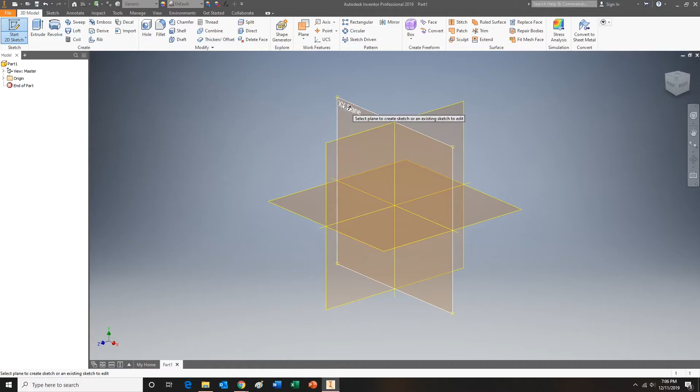All right, start a 2D sketch. I'm going to choose the XY plane. I'm going to do a rectangle, starting with a rectangle that's going to be 2.25 wide.

I'm going to hit tab, and it's going to be 1.5 tall. Hit enter, you can't see it. I'm going to center tap my mouse button, and now I can.

And now I need to cut out the center section at the bottom. I'm going to do another rectangle. I don't want it to be on this green dot, I need it to be over to the side a little bit.

If you look at the little arrow underneath my mouse here, the arrow is pointing at a red line, that means I'm on the red line. And I'm going to draw my rectangle: 0.75, tab, 0.75, enter. You'll notice that these lines are green and these are purple.

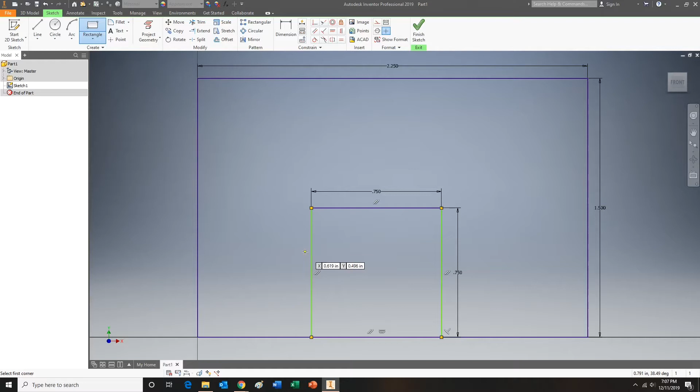The purple ones are locked in and they're good, the green ones are not dimensioned. So I'm going to come up here and choose dimension. I'm going to choose my green line, come over and hit the other purple line, and it will tell me the distance between.

I need to click it down, and I'm going to type in 0.75. And now it's locked in. They're all purple, and I'm ready to go.

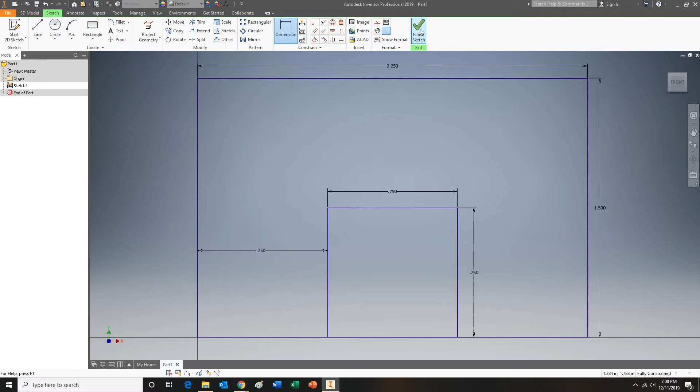Finish sketch, double tap my center mouse button, extrude. I'm going to choose this surface.

I want it to be 0.75, enter, and now I need to put another rectangle on this side here.

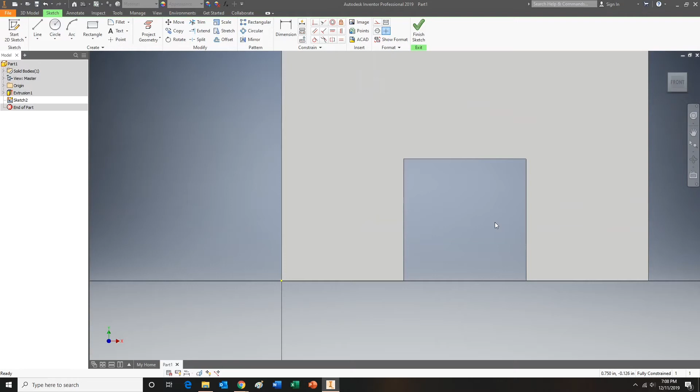Start a new sketch on this surface, double tap my center mouse button, rectangle, green is good. Type in my numbers, 0.75, tab, 0.75, enter.

There's my rectangle, finish sketch, extrude. It remembers, it's the only shape I've got, it remembers the distance from before. I'm going to say okay.

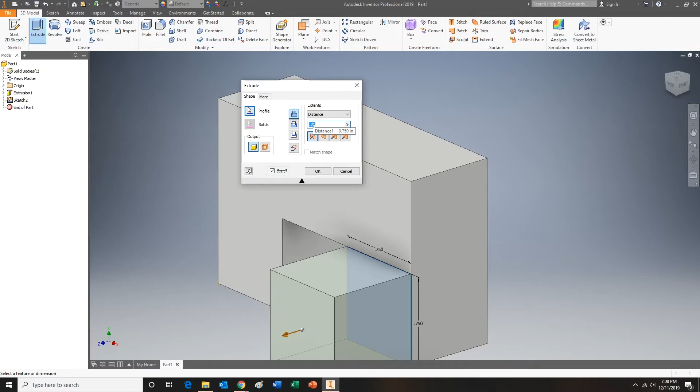Now I'm going to color it. I'm going to choose extrusion number 1, extrusion number 2. I'm going to choose my color and say okay. Double tap my center mouse button, and there it is.

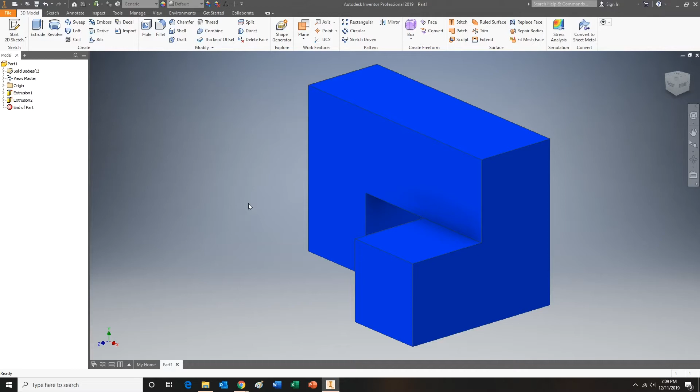It's finished. If you hold down the shift key and hold down the center mouse button, you can now rotate it around so you can see what you're looking at.

When it gets all wonky and you can't figure out where you are anymore, come back and hit the home button, and it'll spin it back around.

Make sure you save it. I'm not going to. And now we're going to look at how do you assemble your cube.

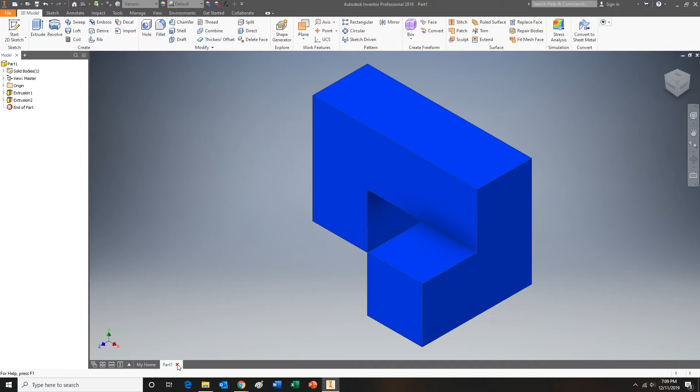And I'm going to come down. Okay, so now we're going to start our assembly. I'm going to click on assembly. Yeah, I know it's not there. Oh, look, I hit it too many times. Let me go back into this assembly.

And when yours first comes up, it's going to say place from content center. We don't want to use place from content center, we want to use place. So we're going to have to change it to place, and then you're going to go in and choose the shapes that you've created.

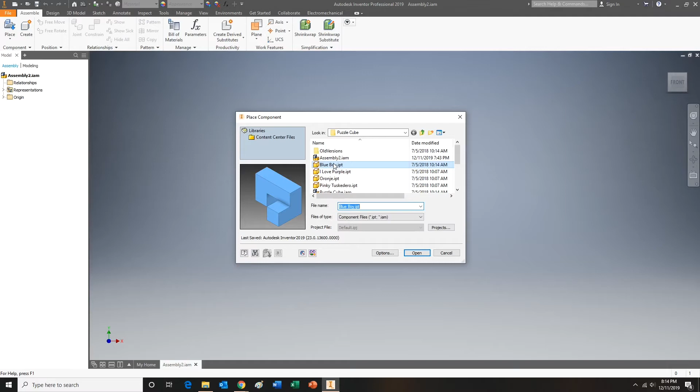So I'm going to start with this first one, the one I created a minute ago. It's super big, but as soon as you click it down, it'll move it so that it's facing the right direction. Now I could go through and click multiple of them, click, click, click, and it would put them out there.

I don't need to do that, so I'm going to right click, OK, and it's my first piece. This first piece has been a bad boy, and we need to ground him.

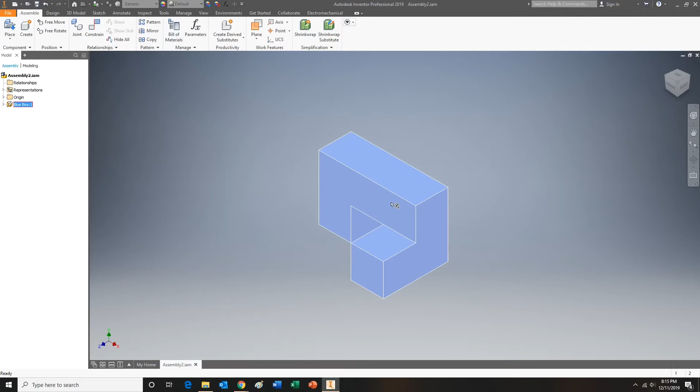So I'm going to right click on the picture, and I'm going to come down here and choose ground. And what that means, now that I put my mouse on it, you can see it's got a little pin, and it's held in place, and it can't be moved. When I click on it and try to drag it around, it can't be moved.

I'm going to take the next one. I'm going to go place, and I'm going to grab the next piece. I'm going to take this one. I'm going to say OK, open it.

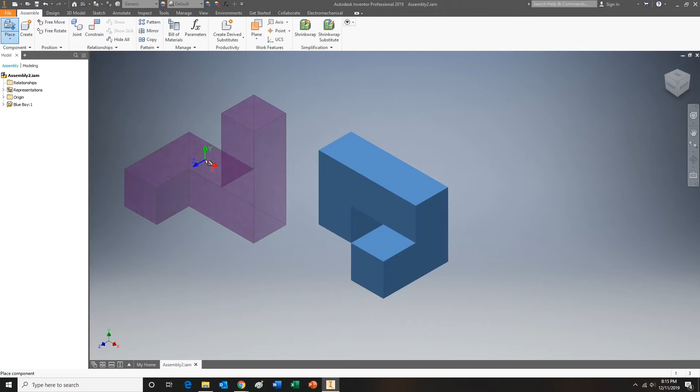And I'm going to click him down, click. I could put another one, but I'm not going to do that. Right click OK. And now when I grab this one, I can move him around.

And so now I need to take this one and attach it to the existing one. So I'm going to use constrain.

Constrain means like tie it up. I can constrain mate, which puts two sides face to face, or I can use flush, which puts two sides side by side. I don't need to flip this guy around.

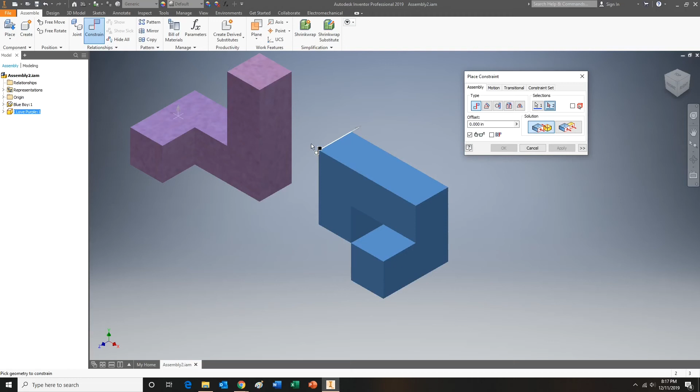Let me move this out of the way. Mate, I'm going to come over here. I'm going to choose this surface, click on it. It's now chosen that first surface. Now I'm going to come over and choose the other one, and you'll watch this guy flip over so that this surface is touching here. When I click it, it pops into place.

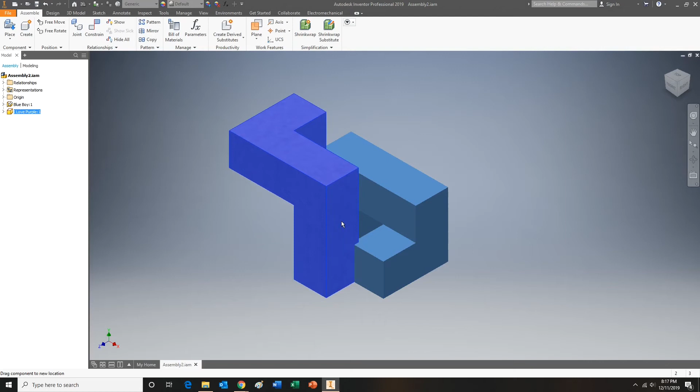Now it's not facing the right direction, but I don't care about that right now. I'm going to hit apply. And if I hit cancel now, what I can do is drag it around, but it's all attached right here at this surface. It's only letting me move it side to side, not up and down. Let me click home again.

Now I'm going to turn it so that this is facing this direction. So I'm going to go constrain again, and this time I'm going to do flush. I'm going to flush this surface and this surface, and it'll turn it once again. Flush, and it turned it again. I'm going to say apply.

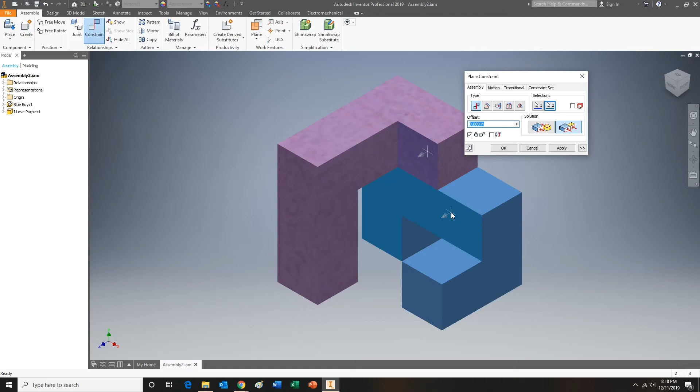I'm going to hit cancel because I need to turn it around. You don't have to hit cancel between each one. And now this last one, if I line it up, you can see that it's flush over here, and we're lined up in between here and here. But when I turn it one more time, you can see I can pull it off of here.

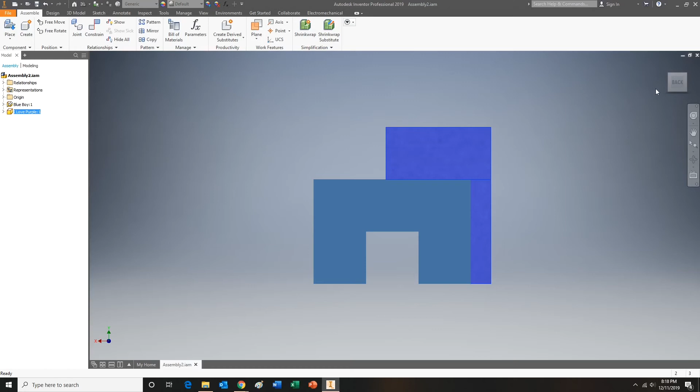So back to home. Oh no, I want to turn it around. And I could use shift and the center mouse button, and it will let me rotate it around. So now I can kind of see where I want to be.

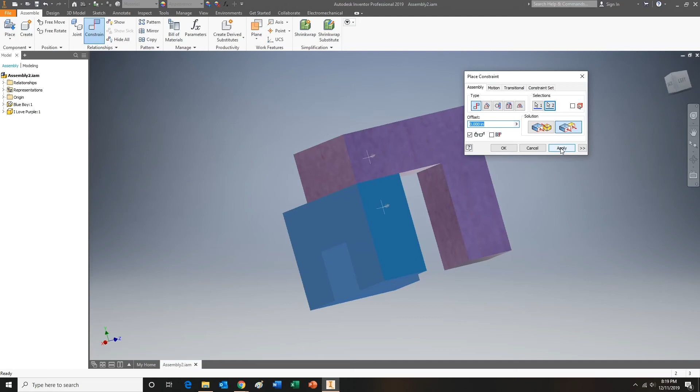Constrain. I'm going to use flush, and I'm going to click here and here, and it pops into place. You hear the pop. I'm going to hit apply. Cancel. So now I'm lined up all the way around. It's all lined up. We come back in.

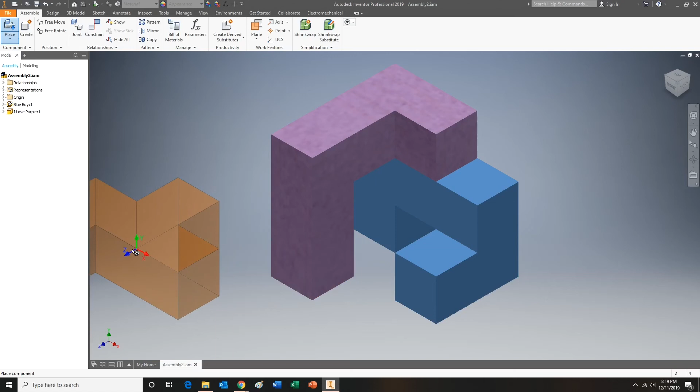I'm going to grab my next piece, which is orange, because I wanted to play with the name. And here's this guy. I'm going to click him down, click, right click, OK. And now I need to figure out where this guy goes.

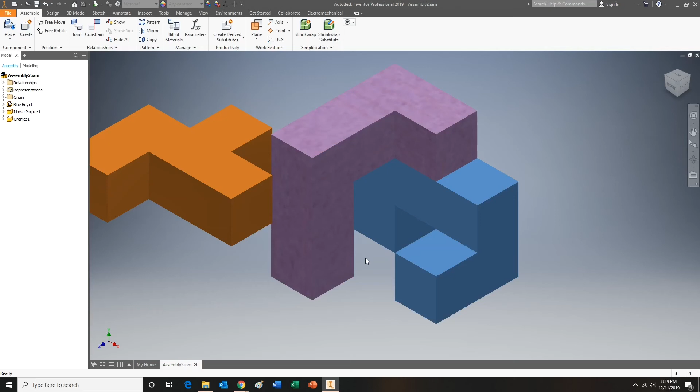So what you want to do is sit there and just play with them and figure out where each one of them goes in your assembly, and get them all lined up where they need to be. This one goes down at the bottom down here, so I might want to flip it so that I can see the bottom.

I'm going to go through and say constrain. I know that this bottom and this bottom need to be not mate - that's a mistake. But if I click here, it'll flip it over so that they're flush with each other. Apply. It's facing the wrong direction. That doesn't work, but I don't want to have to move it.

I'm going to turn this one and have it come flush out to here. So I'm going to keep with flush, click, and then choose this surface, and it flips it around one more time. Apply. Then I'm going to choose this one and flush that, and hit apply.

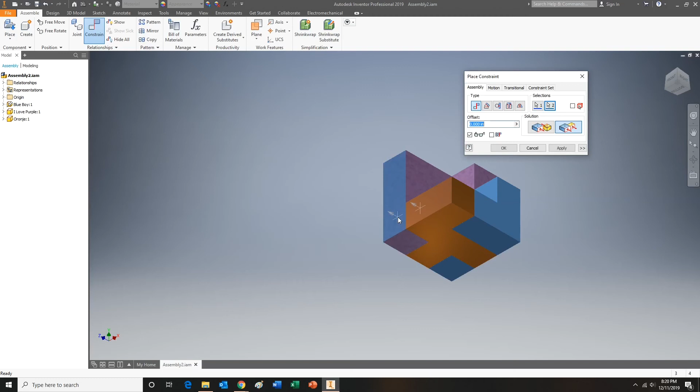Hit cancel. What you're doing is each time you're constraining it in 3 different directions. I constrain the bottom, I constrain the right side, and then I constrain the left side. So I've constrained it in 3 different directions, and you're going to do that with each piece that you put in. You just continue until it's all assembled, and that's where you're at.

Oop, need to bring another piece back in first.

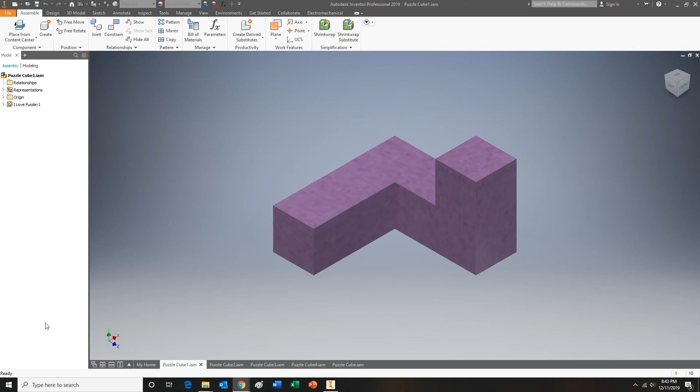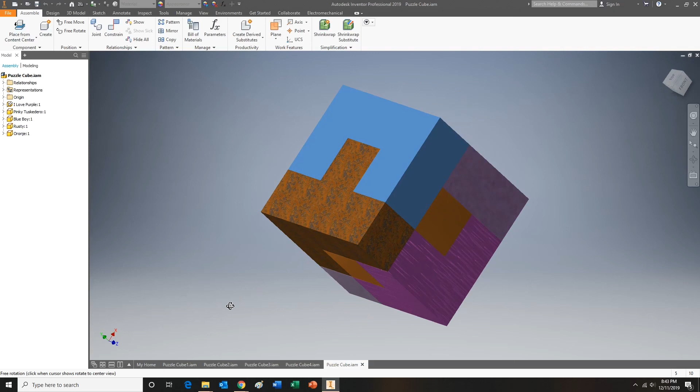And of course I did it wrong. This is what it really should look like. I should have started with the purple guy. Part 2, part 3, part 4, part 5. Completely assembled. Shift key, middle mouse button lets you rotate it around and see what it should really look like assembled. Good luck!